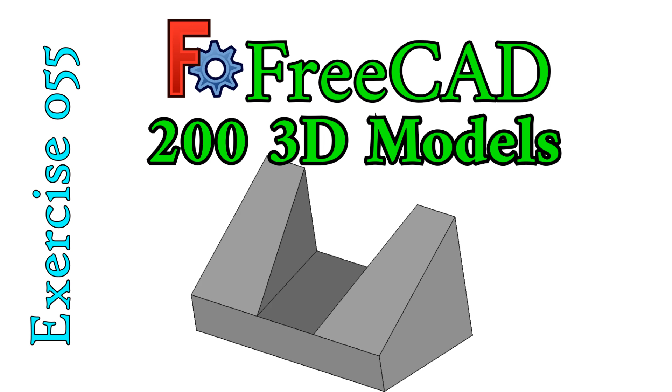Today I want to work on exercise 55. Now, exercise 55, I already did it in one of my previous videos. I went back and found it. It was practice 9 from my FreeCAD beginners test.

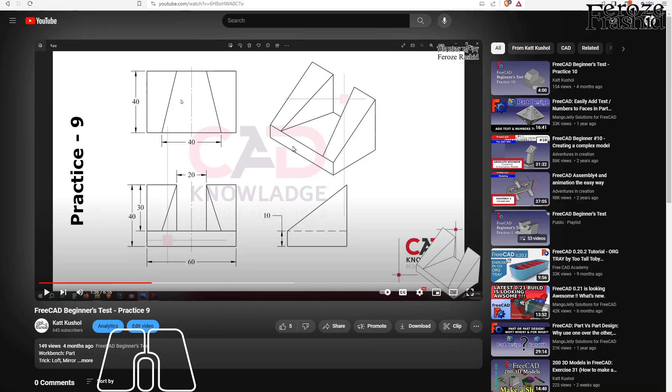What I did was build this part only and then mirror it over on the other side. So that's already done. It was done in Part workbench. Today I want to explore a different idea. I want to do it in a different way, still in Part workbench. So let's go ahead and do some calibration.

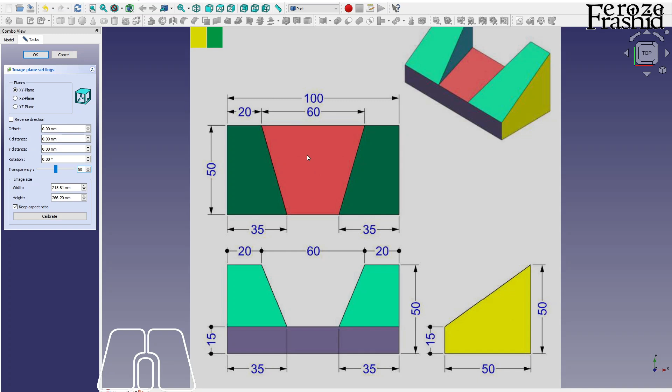All right. I want to keep that on this surface. So if this is XY, this is XZ, this would be YZ. I want to place it on a YZ plane. All right, so let's go place that. So it's on the right side. Now I want to place that axis cross in here at this corner.

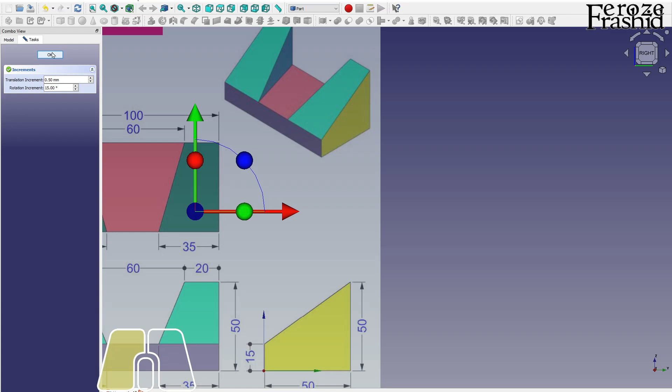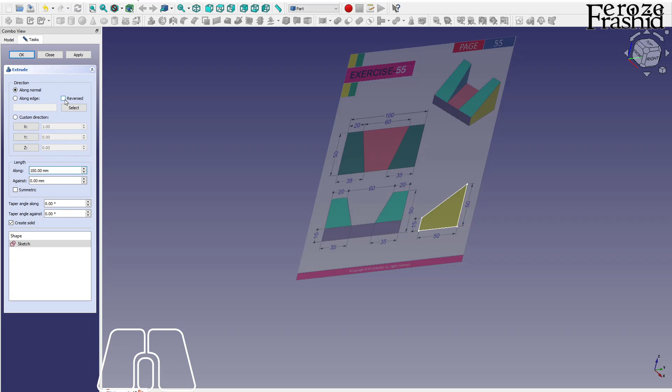All right, take that axis cross away by pressing A, C on the keyboard. And now let's start sketching on YZ plane. So it is a pretty simple sketch. All right, this is 50. These two are equal, and this is 15. Pretty cool. Now I want to extrude that for 100 millimeter on the reverse side, so that way it's pushing it back.

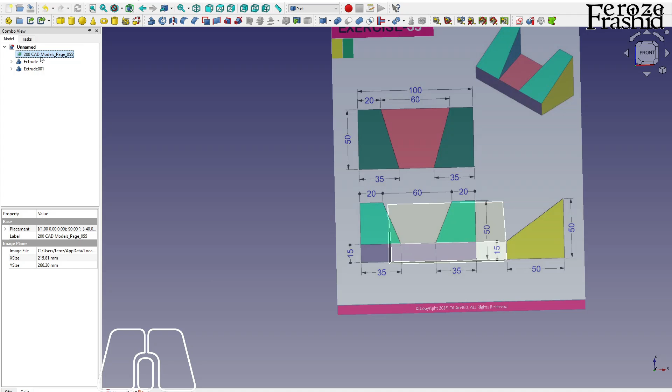Now what I want to do, I want to build this middle part and then cut it away. So for that middle part, I need this XZ surface. So I'm going to place this on XZ and then, where is XZ? Here. And relocate the image to go with the image. Okay, here. All right. So I'll have to build this middle part.

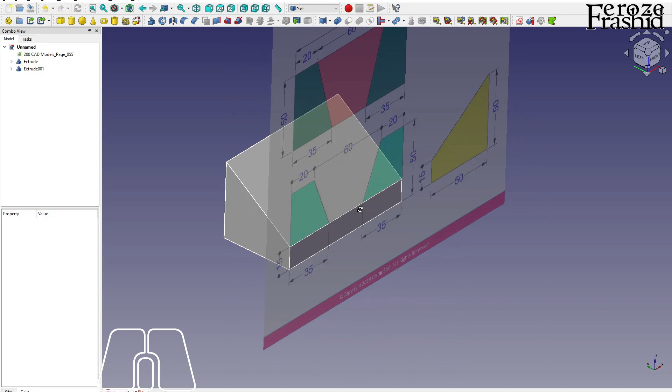I'll be using loft. On the loft, as I mentioned in the other video, I have a pretty good cross section on here, but the exact loft that I will need will have to come to a straight line here, which I cannot build a loft out of. If I have 4 lines on this section, I need 4 lines on here too. So what I will do, I will take this whole part.

Now again, this is not the easiest way, obviously, because the easiest way I already did on practice 9. I'm just exploring a different idea, not necessarily the easiest way. 35. For the easiest way to build this object, please visit my other video.

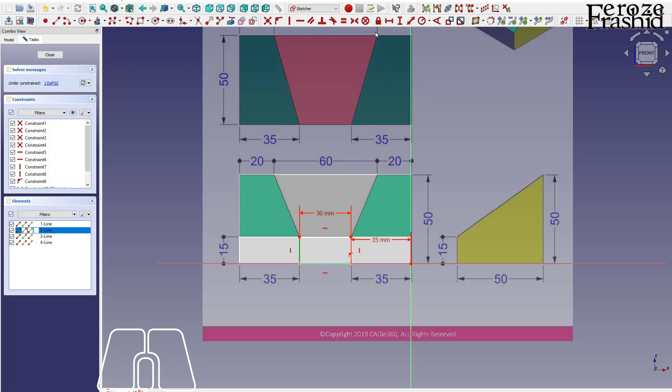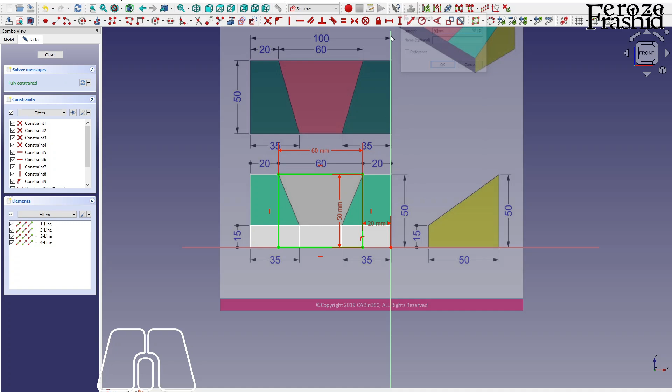So the distance between these two would be 20. The length of the sketch is 60. And the height would be 50. All right. Now I want to place it actually on the other side. There. What I want to do, I want to build a loft out of these two. So let's go ahead. Select this one, select that one, create a solid.

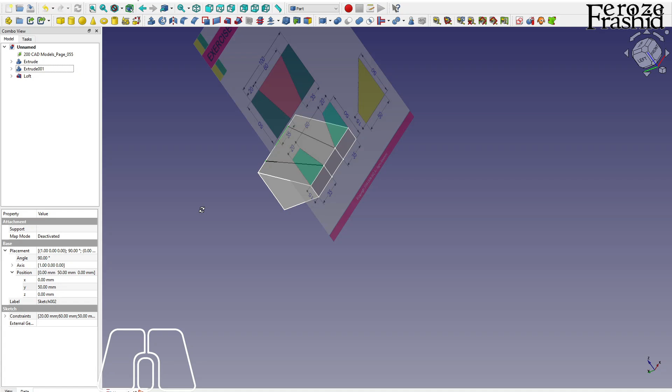Now in Part Design workbench, there is additive loft and subtractive loft. In Part workbench, there is only loft, and then you add it or delete it later on, but there is only one loft. Alrighty, so we have this extrude, and there is another extrude. Why do I have two extrudes? I think I have the same thing twice. I'm gonna go ahead and delete this one.

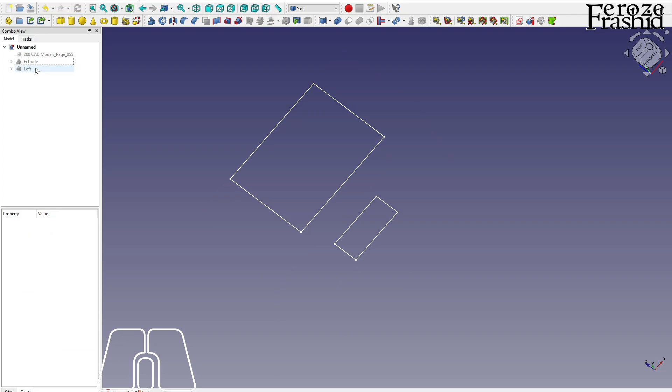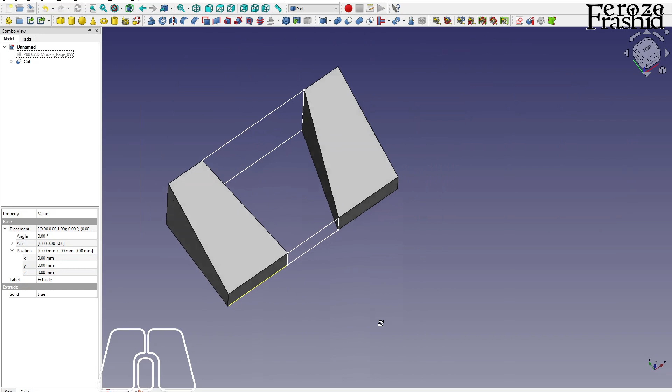Okay. Now I can go ahead and make a cut. So I want to keep this. I want to delete this, right? And make a cut. That takes our base pad as well, which I didn't want. So that's an issue. Now I can build another pad in the middle to make the object complete. Or before making the cut, I can split the loft. To reiterate, not the easiest way to do it.

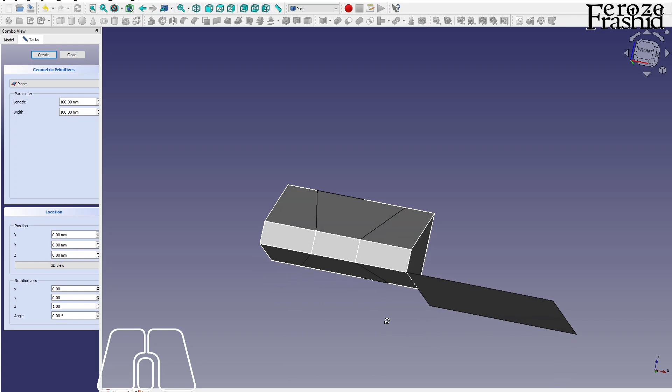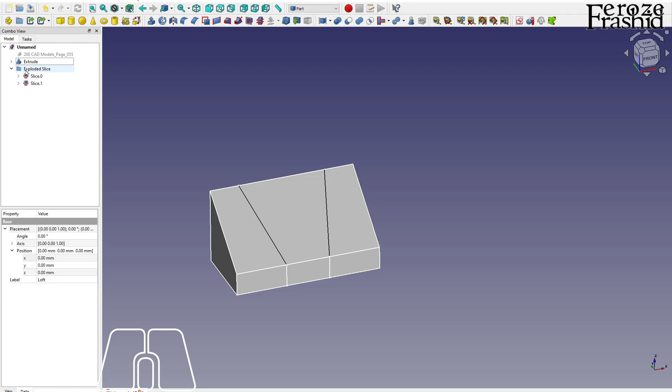I want to create a plane, right? Close. This plane would be on Z direction, it would be at 15. Let's make it minus 100. That way it's there. Okay, so I created a plane. I can take the loft and select the plane and slice it apart. So now I have two slices, one here, one there.

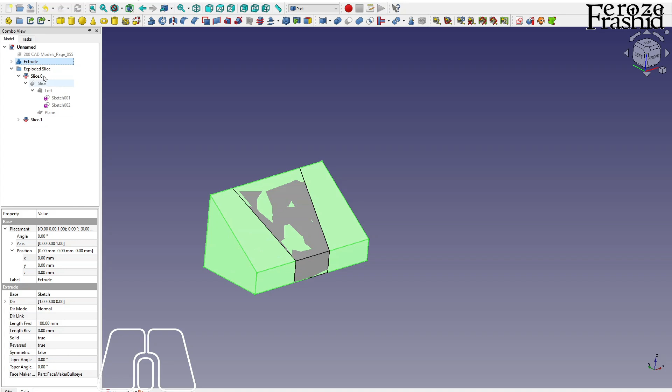What I can do, okay, let me hide this. So this part is sliced apart in two. I can keep one, delete one. So now what I want to do is I want to hide this sketch and this sketch. I want to bring this back. I want to keep this one and take only this slice away. So take this extrude and this slice away. There. That's my object.

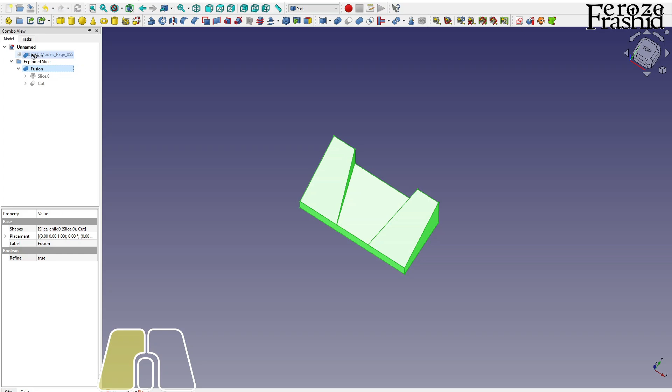So in the previous video, I only added things and mirrored it. In this video, I did not use mirror at all. I just built the object and took things away. So this is my final object. I want to fusion it, right? And call it final object.

So I mentioned just a little bit about mirroring, not doing mirroring in this video. I was doing some mirror reading on the internet, and then I found this interesting line. So there is a video where I talked about mirror in different workbenches. Part workbench does not allow any reference plane to mirror against, which we can do in Part Design. We can do something else with the mirroring in Draft workbench as well.

Now I read into this FreeCAD wiki. Here it says, this is the interesting part: the mirror plane may be a standard plane XY, YZ or XZ, which we already have, or any plane parallel to a standard plane, which you can do by offsetting, right? And then it says, or introduced in version 0.22, which hasn't come out yet, it will come, any arbitrary plane by using a reference object. That's what I miss a lot in Part workbench. They are going to introduce that in 0.22. Any arbitrary plane by using a reference object.

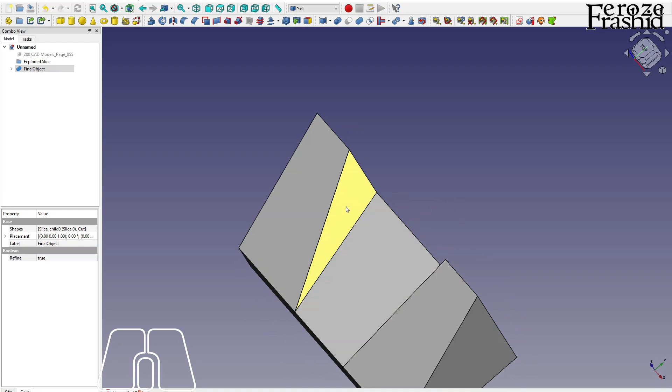So what it means is, if I wanted to take this object and then mirror it against this inclined plane, I should be able to do it. Right now I cannot do it. Right now if I wanted to mirror it, I have XY, YZ or XZ, those standard planes, and I can offset those. So any plane parallel to the standard plane, but I cannot take this random inclined plane to mirror my object. I'd have to go into Draft and do that.

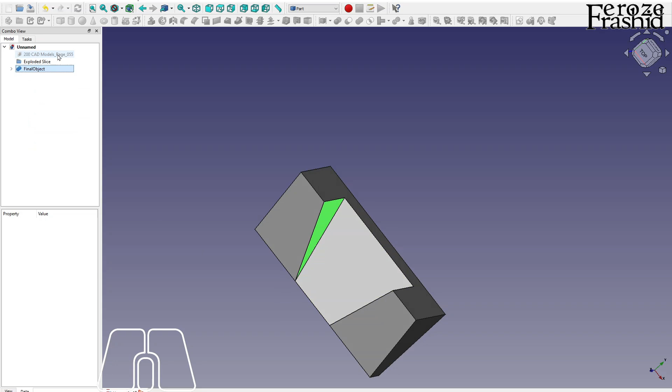So in 0.22, it's 0.21 now, in 0.22 we will be able to do that in Part Workbench, which is awesome for me. I love Part Workbench, and it is missing some of the features that other workbenches have. I'm so happy the developers are bringing this, at least the mirror part, in this version. Hopefully later on they will keep bringing all these new features to Part Workbench, so I wouldn't have to go to Part Design or any other workbench.

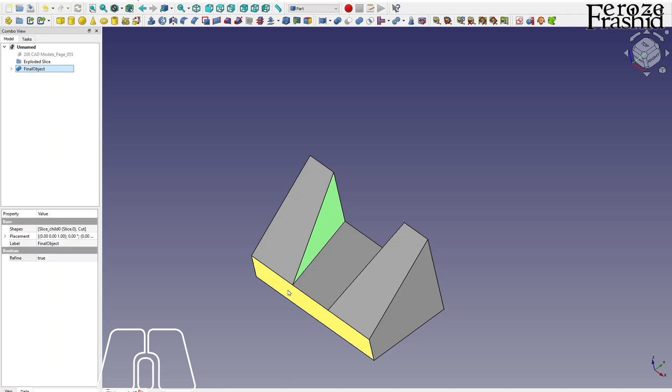Anyway, thank you for watching this video. I'm sure you will enjoy the previous one to build this model, but still it's good to know the workarounds and different tips and tricks.